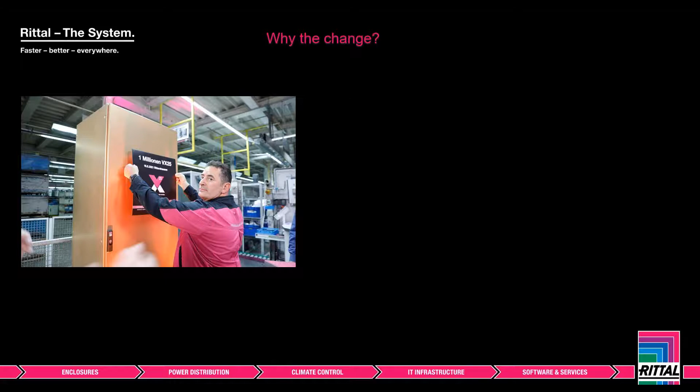During that time, we then developed the VXIT and its accessories. The VXIT will now be the standard offering, again because of its versatility, its ability to work alongside industrial products as well, such as our Blue e+ cooling range. This means it's ideal for all solutions, from an edge solution that may be required in a manufacturing environment through to cloud, hyperscalers and colo. So the VX frame now stands across both sectors, industrial and IT, and we can interchange accessories between both markets.

So to show you in a little more detail the actual product itself, I'm just going to run a short video which will give you a brief overview.

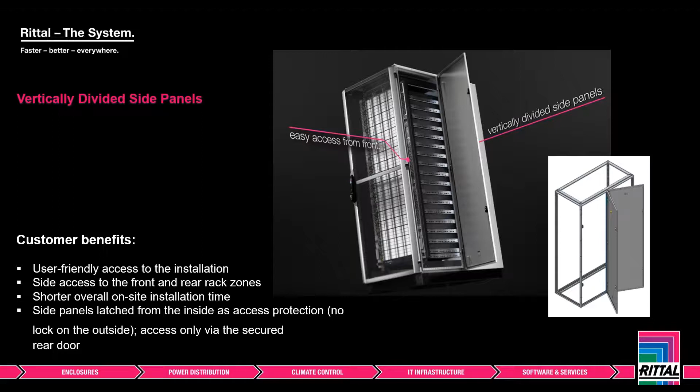The new design of the cutouts on the cable tray also provide a great time saving when installing items, such as a PDU. The keyhole cutout now incorporated into the tray means PDUs simply slot in—you take the PDU out of the box, and the fix on the back fits directly into the keyhole. It's so easy to fit these parts. All of these designs are really there to make things simple, effective, self-explanatory, and a great time saving—that's the idea behind these new innovations.

One thing you may have seen in the video that's new to the portfolio is the automatic door opening. The idea behind this is effectively a door within a door option. Small internal doors are operated by door magnets, and these can be used in conjunction with our CMC system. So if the CMC system detects that cooling has failed, the small doors within the large door will actually open to eradicate some of the heat.

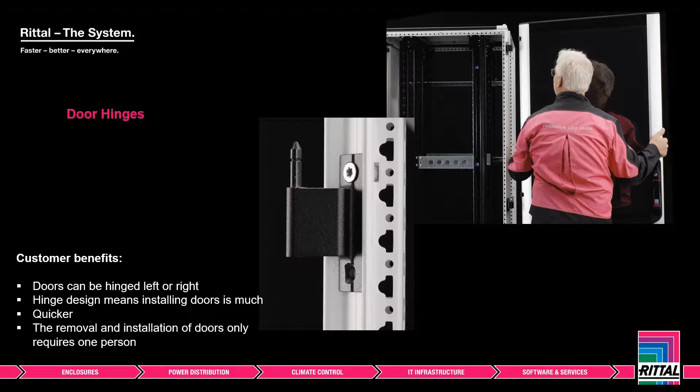As with TS8 hinges, the doors can be hinged on either the left or right hand side. Obviously the handle then needs to be removed to ensure it's working the right way up. But as with our VX25 enclosures, this is now a toolless process to remove the handle and reinstall it.

All we simply do is pop out the pin in the back of the handle, as we can see here on the instructions. We take the handle off, and then with the handle in its open position, we offer it back up to the door, to the location points, and then simply close the handle and that will lock it back into place. We have this design on the standard industrial VX25 enclosure as well, so it's about familiarity and using the same innovations across both ranges.

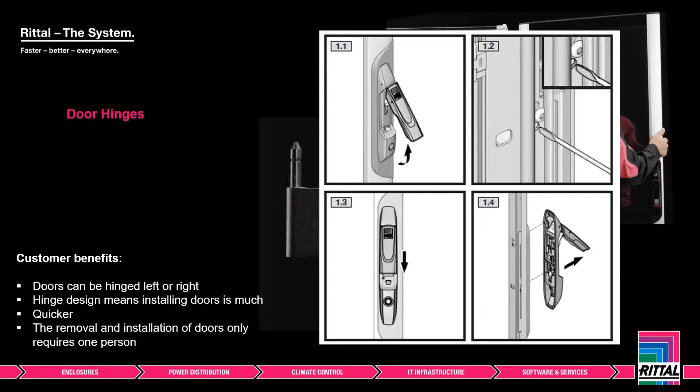Something the VXIT now offers is two options on loading of the 19-inch frames. These are worded static and dynamic, though it's not dynamic in the true sense of the word as some of you will think — some of this is due to translation. However, what it effectively means is that the standard 19-inch angles can take a loading of 1,200 kilos, and the dynamic angles, with a slightly different design and thicker material, can take up to 1,500 kilos.

Moving forward, one thing we want to offer customers is shorter lead times. So with standard build racks, which typically incorporate most sizes, have the 19-inch profiles fitted and different door options such as vented, glazed and split doors, these will now be kept in stock in the UK along with the most common accessories such as casters, leveling feet, side panels, air baffles, etc. This will mean a 24 to 48 hour delivery depending on what time of day you place the order, with a number of different sizes available. We'll see this as we work through the configurator, as it will give us an idea on lead times.

We still have the ability to offer pre-configured cabinets for a specific build, though as you'd expect these will be on a slightly longer lead time. So for anything where we're looking at standard parts but it's not a configuration we offer off the shelf, we can create this for you, and we can also look at customizations — for instance specific colours, or a specific size cabinet that we don't offer in the range.

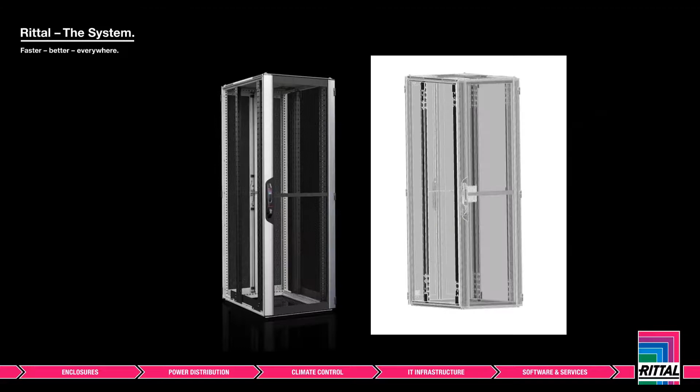The configurator is designed to help you select the rack and the relevant accessories. It also allows you to visualize the products and creates bills of materials. The configurator is there to try and eliminate, to a certain extent, the potential for human error. When selecting accessories, it will only show accessories designed to fit that specific rack, reducing errors when selecting parts on the website or catalogue. It can also offer accessories you may not have considered or that you need. One of the big time savings is not having to search for parts and part numbers, either on the web or in the brochure. The VXIT configurator is on our website.

As we're only launching the VXIT this week, the configurator is currently linked to our Rittal.com configurator. So when you use our website, there is a Rittal UK version, but the configurator itself links to the .com one. The difference in the next few weeks is that the UK configurator will also add details on lead times specific to the UK. At the moment, on the .com version, these lead times are based on stock in Germany going out to customers in Germany, so in the next week or two you'll see it change to UK stock.

There'll also be a function on there called add to cart. So as you're working through your configuration, at the end there'll be an add to cart function. You simply click on this, it will put it into our web shop, and then you'll be able to buy the parts online. But I'll talk you through this as we go through the configurator.

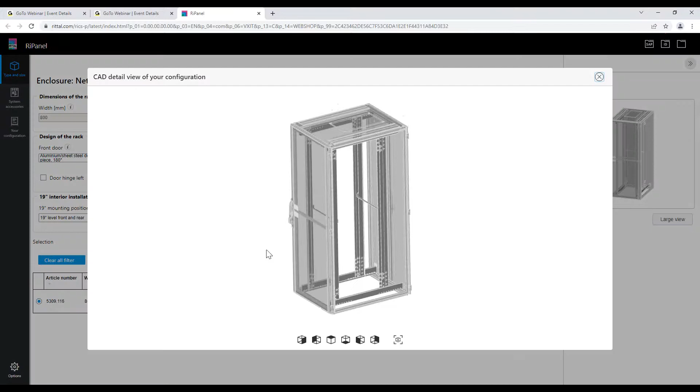We can manipulate this to look at it from different angles. We can see that we've got the split rear doors in there, and it comes fitted as well with the comfort handles. So it's just confirming what components we're actually going to get with that build. We can see how the 19-inch angles are fitted, and the types of bracketry that's in there. Again, we're happy with that selection.

What we're now going to do is look at the accessories, so we simply click next. The nice thing to remember about this is it's a configurator - you can't break anything. So if you're working through a configuration, you can amend things, you can change things as you're working through it, but you can't break it. So please jump online and have a play around with it - it's all quite self-explanatory.

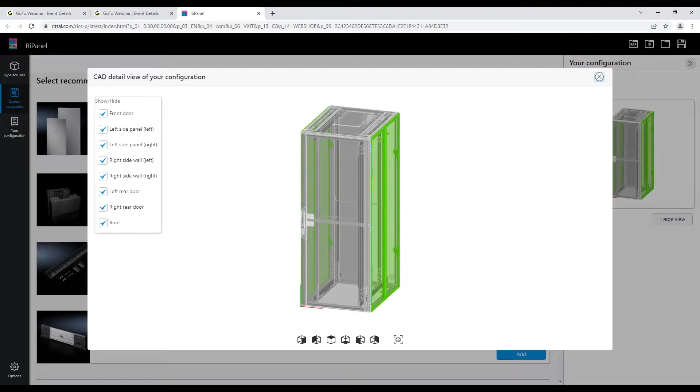So we can see here, it's put our side panels on in green - these are the new ones, as we mentioned before, the vertically divided side panels. If we want to look at that in a bit more detail, we can just take away some of the other information on here, such as the door, the rear doors, the roof, just to get a better view.

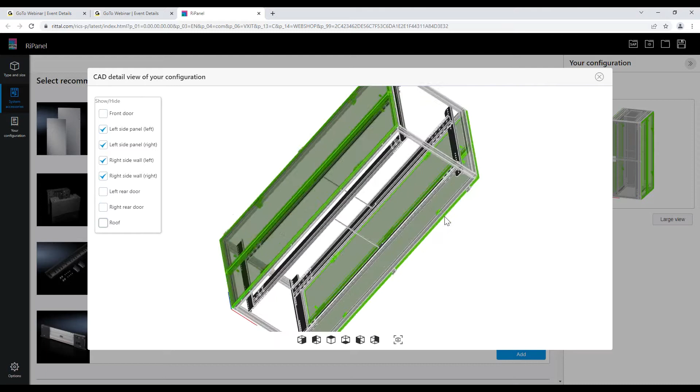We can see, as I mentioned before, we talked about the internal latches - so we can see that they are here. You can see these are the latches that are inside. Again, you can just visualize what these parts are.

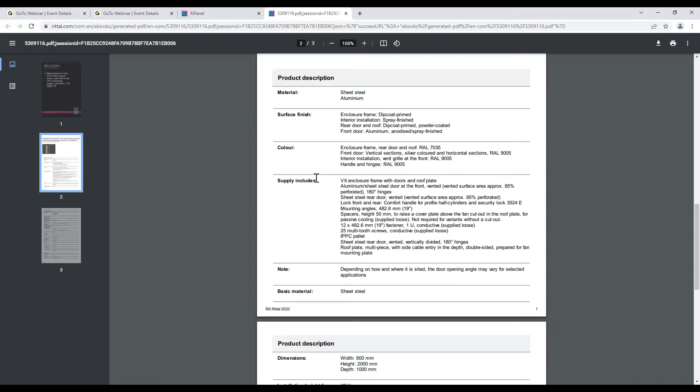Another great tool here is if you want a bit more information - you've selected those parts, but you want to know, do they come in a pack of 2, or do we just get 1? What's the article weight? We can click article information, and that opens up in a new tab giving us a PDF sheet on that part itself. So we can see here, those are the side panels - I've got all the information I need about what the supply includes, the details, the weight, anything I need to know is there. This is a great document that you can see straight away visually, and you can use that as part of the tender process.

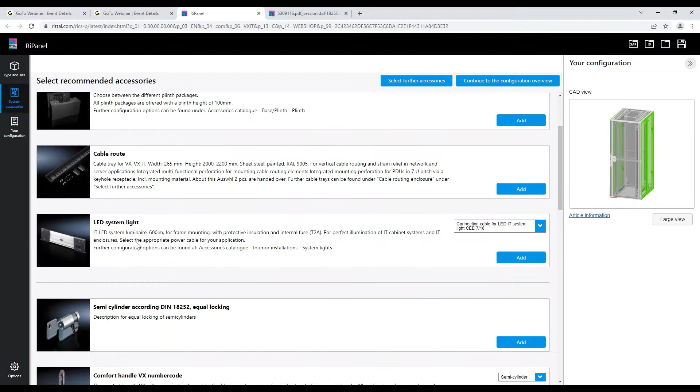So again, you can collect all this information for a quotation. Scrolling down here through the other accessories, we have things such as the cable tray, LED lights. We can change the different types of lock cylinders, the different types of handles. We can put PDUs in. Again, some of the more common accessories, such as cable shunting rings, air baffles. So if we select some air baffles here - if I select the air baffles that are to be used without an LCP, sorry, I've selected the wrong one, I'll just amend that - and again, we simply just add these to our configuration.

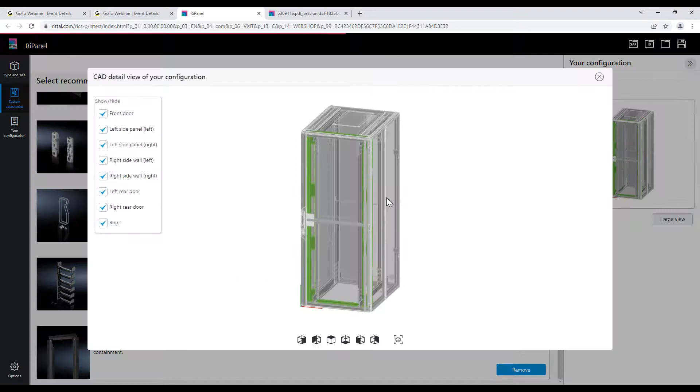So it's now just adding it into the build. We can see on the large view there that these have been added. So we now have the air baffles in, and now I want to move on to further accessories. Whilst these are the most common ones, you then have the option to add more accessories in - we simply click the select further accessories button.

So what I want to do here is look for some levelling feet. On the base and plinth section, I can click levelling feet and casters. There are a number of different options here, and whichever one we click, we'll get a visual on the right hand side so you can see what parts you're selecting. I'm going to go for the levelling feet.

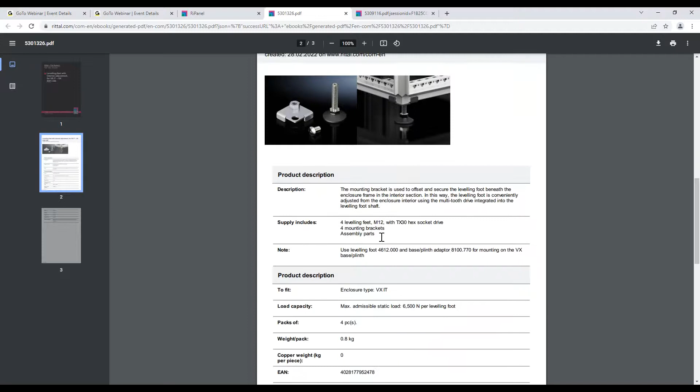As mentioned before, this is great because I can click on the article information and it'll tell me what pack size I get, so I know how many to add into my build. For instance, it tells me the supply includes 4 feet, so I only need to add 1 pack here. We click confirm, and that adds it into our selection.

What I want to show you now is a nice tool the system does for us. If we were to add something such as a rail system, a piece of punch section, which again is quite commonly used.

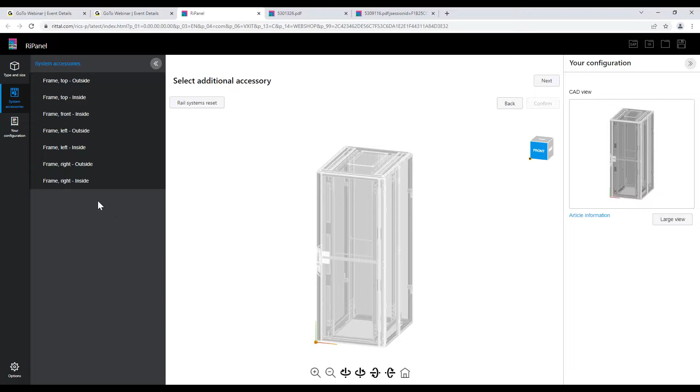Now the punch section tends to fit on the actual frame of the enclosure, the VX frame. So the first thing it asks is where would you like to fit this accessory. I'm going to say I want to fit it on the inner frame. Like with the TS8, we have an inner and an outer level of the frame. So if we say on the frame, on the right, on the inside, the punch section shows on the right hand side here, the image. But the system tells me the accessory cannot be added because it collides.

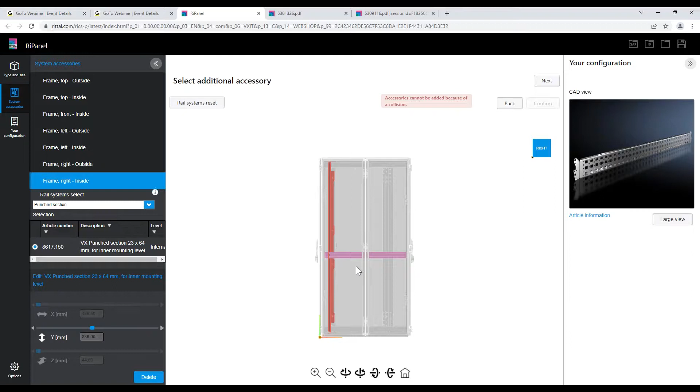If I were to use this part on the inner level, it collides with the air baffles. This is a great tool because you might think you can use a part for something and then only find out once you actually get the components that you can't, and have to rethink the design or build. You're getting this information up front, which is just a time saving, something to assist you. It's saying here I can't use this punch section because it clashes with the baffles.

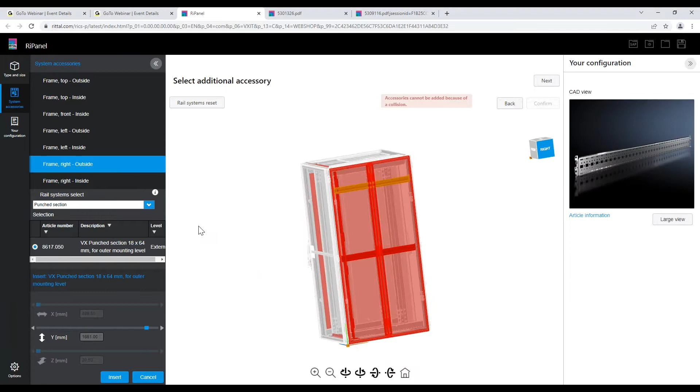Let's fit that on the outside of the frame instead. But it's now going to tell us that it clashes with this particular side panel - the vertically divided side panels, because of the centre bar, we can't use that. So this may be where we decide to either use a different type of internal fitting, or change the type of side panels. Again, it's all about trying to make life a little easier for you in your actual build.

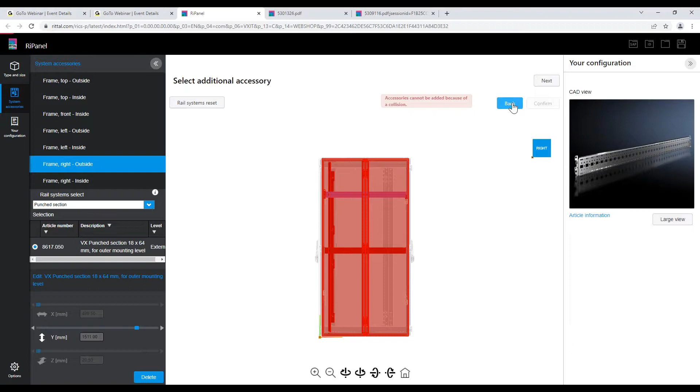So I'm just going to get rid of those, and we'll go to the configuration at the end - the summary of our build. You can either click through on the next button, or simply use the left-hand side toolbar to go to the configuration. What we'll see is a parts list, and there are a number of different ways we can use this parts list, and get information from this configurator as well.

At this moment, it's saying this is the rack we've picked, and it's a stocked item, so we can have it in 24 to 48 hours. The accessories I've picked here are all stocked items as well, which is great news. We can amend these using this little edit button - if we wanted to delete a side panel or the air baffles and go back and select more accessories, we can. Just simply delete these out, or we could move forward with this.

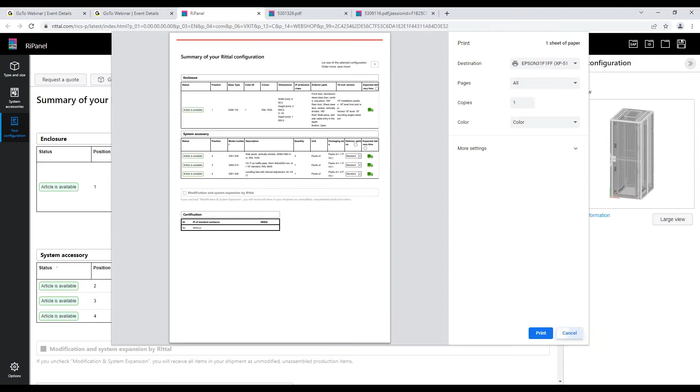Options here are we can get a parts list, which downloads as a CSV file you can use as an Excel spreadsheet. So if you need to put that into your ERP system or pass it to a colleague, we can do that. We can simply print the page in front of us, so we have all the information there. On the right hand side, the icons at the top let us save the configuration we've done, but we also have an option for opening other configurations.

The other option is, if you don't just want the accessories to come loose and want this as a pre-configured option, we can request a quote. That goes through to our offices in the UK. We just need a little bit of detail from you, and if you put the comment please quote pre-configured, the office can provide you with a cost and a lead time based on the specification given.

If you want all of the information we've drawn up today, you can click on Get Technical Data. This is really important, as it's where you determine how you want that sent, whether to yourself or to a colleague. I tend to put my own email address in here and send it to myself, and I'll show you what information you actually get from this.

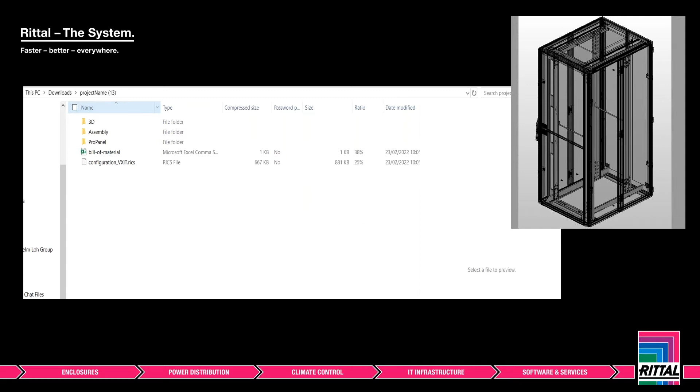If I look at the 3D file, for instance, not only do I get the 3D step file of the configuration I've done, but I'd also get it in PDF format. That's great if you need to send your design to someone without any CAD package to open it in - you can send them the PDF version instead. You also get the PDF parts list and the different component builds, so a number of different options in this.

For those who work with our sister company ePlan, you'd also receive the ePlan file, the Excel bill of materials, and the actual configuration file, which again can be loaded into the Configurator. So there's a wealth of information there that it provides.

The Configurator is a fantastic tool, but as I said, there are things you can't do for certain types of builds, purely down to so many variables when fitting accessories. These don't show on the actual build itself, but they are part of your overall configuration and are in the bills of materials. We want to keep this Configurator as a free tool for you - it's a Configurator, not a drawing software package.

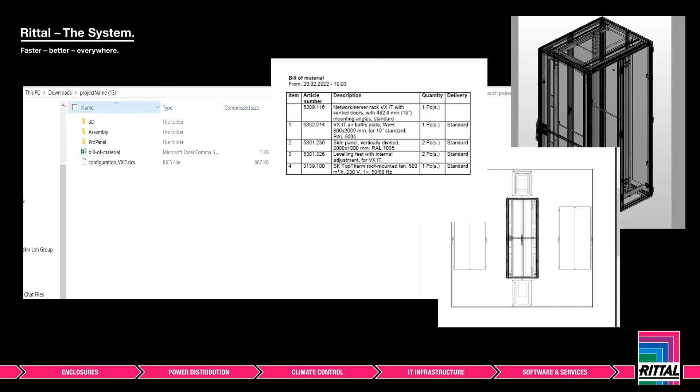So I've covered what I wanted to cover today on the VX IT and the software. I hope you found the webcast useful. If you want to watch it again for any of the information or the demonstration on the Configurator, you'll see it uploaded in the next few days to the Rittal UK YouTube channel.

This channel's got a wealth of information on it. We upload all our webinars, frequently asked questions, hints and tips, and there's also all the how-to videos as well. If you're trying to understand how to fit a part, such as a cable tray, or change the hinge arrangement on a door from left to right, jump on the YouTube channel and you'll find them all there.

Another area is the blog section of the website, where you'll find information on webinars, white papers, and application stories - a great source of information. And then there's the actual website itself. If you jump on there at the moment, the moving banner shows the VX IT rack, and you can click on further details. You'll find instruction manuals, how-to videos, and other webcasts there as well.

And lastly, if training on the Configurator is of interest and you'd like to delve into it in more depth, please get in touch. It can be conducted either by myself or your local area sales manager, and we can do this virtually or face-to-face, whichever works best for you.